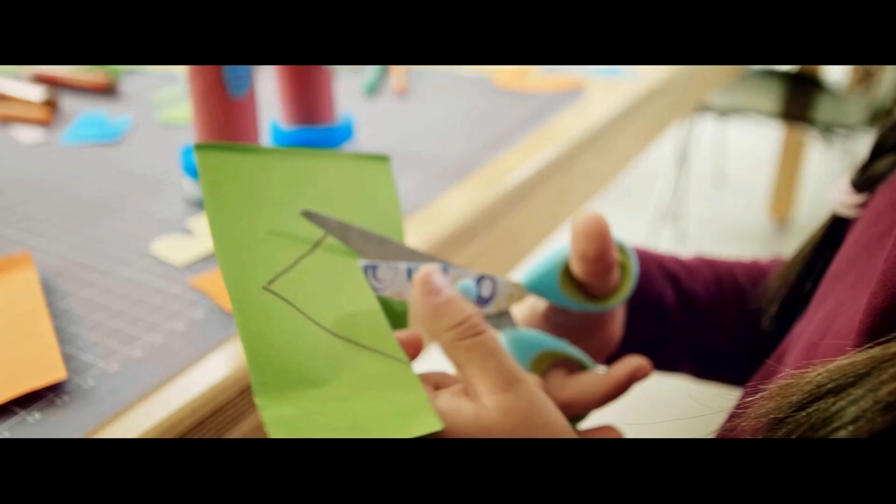This is Zoe, a little girl who builds a toy robot just based on her imagination. Wouldn't it be great if she could order this little toy robot as a really produced toy with just a fingertip?

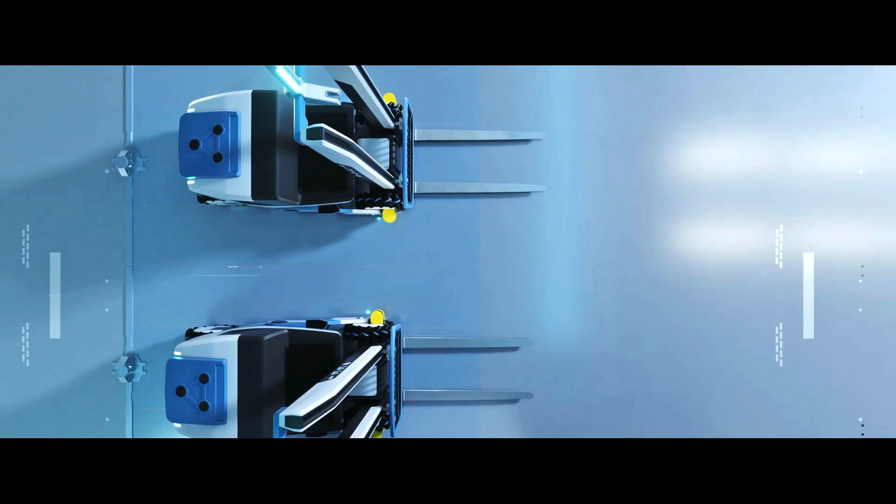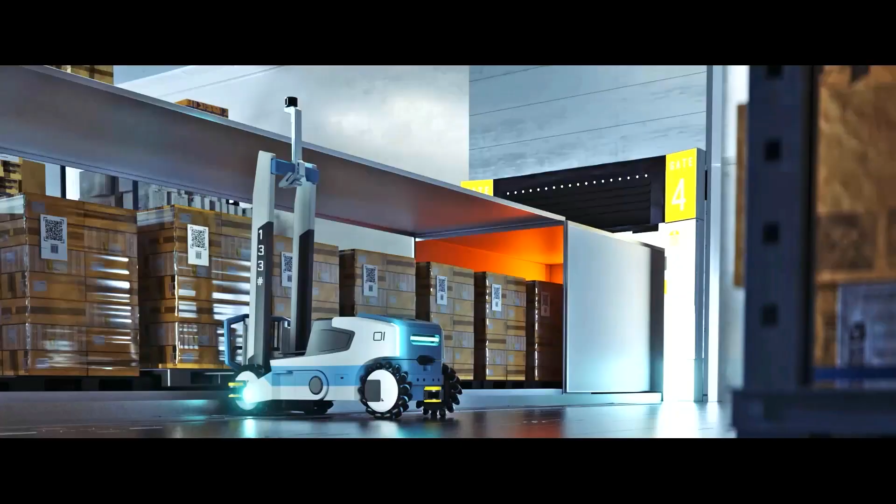Before production of this little toy robot can start, the whole supply chain must interact with the autonomous factory. The material must be delivered to produce the robot, and now we are in the material receiving area. There you can see how autonomous forklifts are able to unload load carriers and raw materials from a truck. For this, different AI technologies will be needed, like object detection, pose estimation, and the generation of the overall workflows of these forklifts. These autonomous systems will be equipped with advanced safety functionalities to allow for safe human-machine interaction.

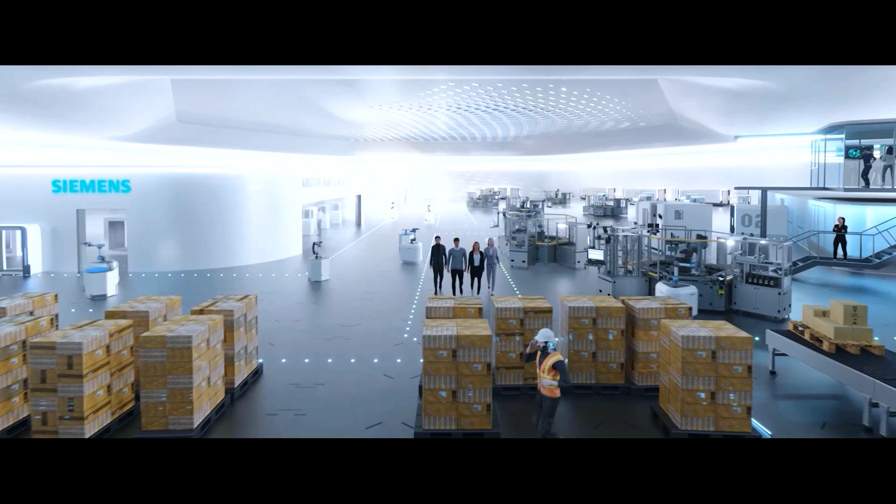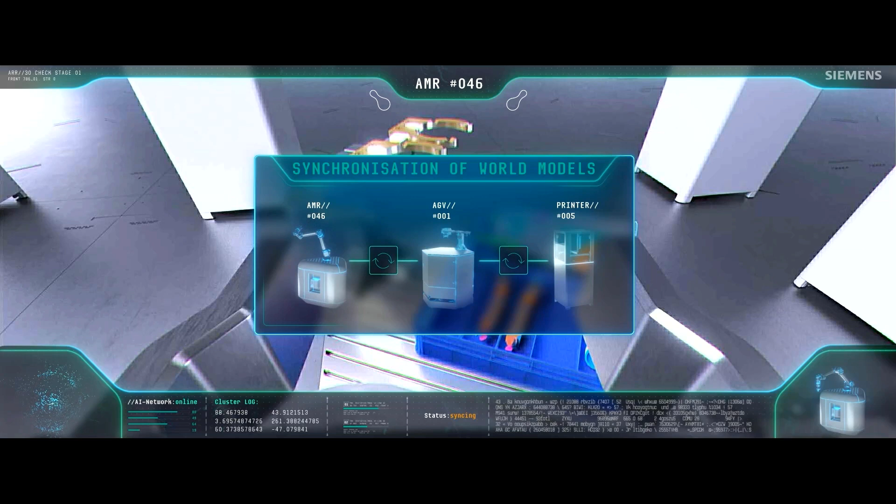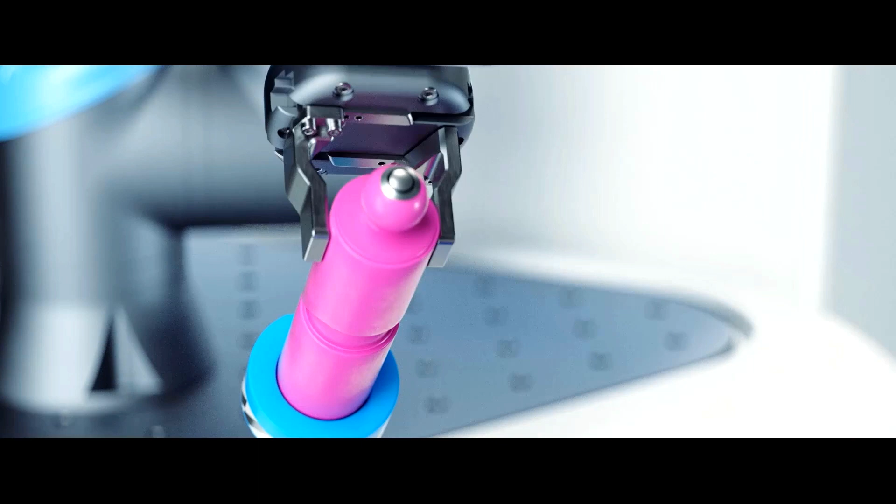And while our little girl Zoe is waiting for her robot to be produced, in the factory different intelligent systems group together to solve tasks collaboratively. To do so, they have to exchange information, for example perception of their environment, and synchronize their world models. But not every task can be handled with just a few machines; sometimes we have to break down very complex tasks into subtasks, like the assembly of the robot. To do so, we will need a central intelligence still, which is able to optimize the overall production process together with intra-plant logistics processes and assign machines with the adequate skills accordingly.

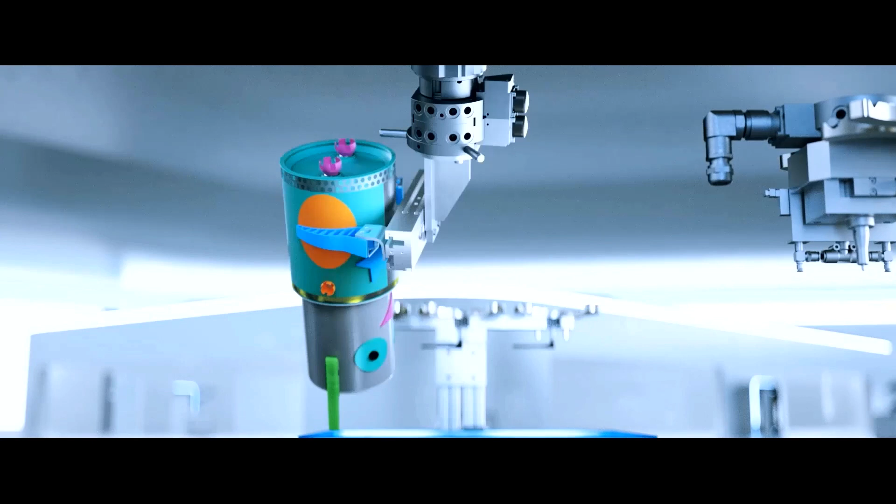But even the most intelligent systems using AI could reach certain limits. For example, if they are not confident about a certain prediction, they will ask for help. So this is a feedback loop between human and machine, to really give feedback to the system and let it learn continuously.

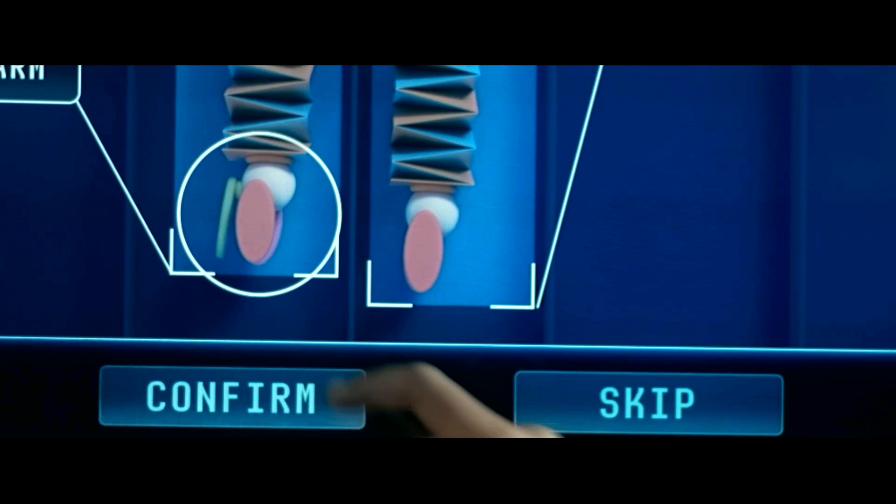So that's just a snippet of our vision of the autonomous factory of the future. But I think it gives you some idea how this could look like. Maybe it's 10 years, 15 years, 20 years away, nobody knows. But we really believe that this is key to hopefully make every wish come true, not only of this little girl, but also of every one of us.

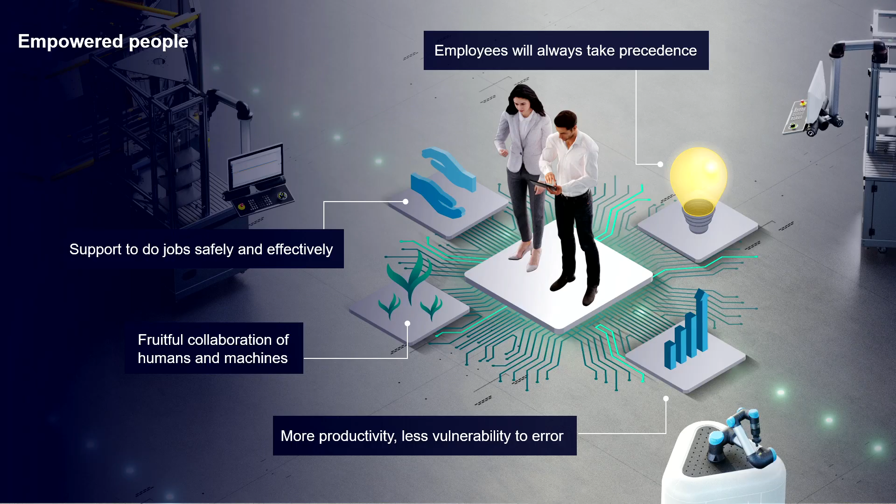What's really important for me, and I think you saw that in the video, the autonomous factory is designed by and for people. So this means we are not talking about lights-out factories or something like that. There is the human operator and supervisor in a central role.

This means there will be interaction between intelligent systems and the human being. There will be tasks that only can be taken over by humans, because the human is, in the end, unbeatable in terms of creativity, in terms of problem-solving skills, in particular in situations that you haven't experienced before.

So it's all about the interplay between artificial intelligence on the one hand side, where you have intelligent algorithmics, super fast processing power, can process huge amounts of data. On the other hand side, you have human intelligence, creativity, problem-solving skills. Bringing these things together, really getting the interplay done, this will be the next level of automation that we can achieve.

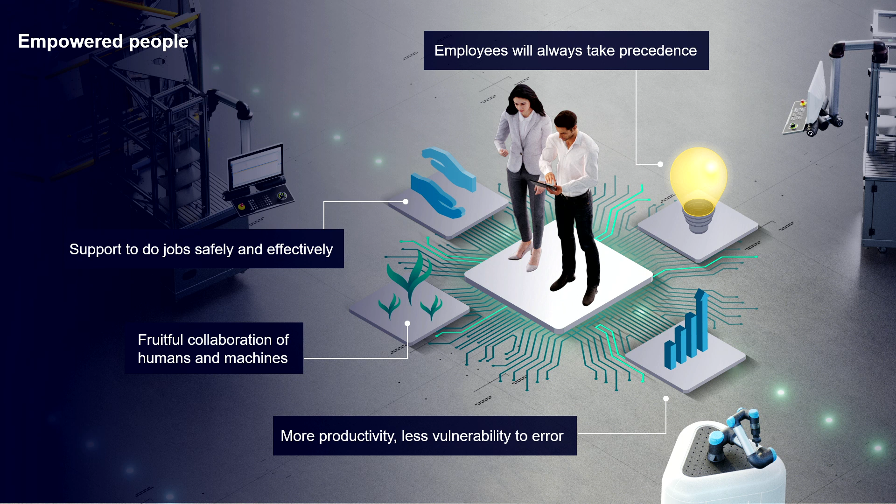Now I talked about the role of AI, and this is really one of the most crucial technologies in this game and in this vision of an autonomous factory. And in the meantime, you can see AI all around the place. It's extremely versatile. You can see it in different use cases in different industries.

For example, there are use cases that are a bit more simple, like anomaly detection, predictive maintenance. On the other hand side, you have even more complex use cases like process optimization, autonomous systems, as we saw it in a video, and you see it around here on the fair as well. More and more intelligent robots are coming up. And you can see that in every vertical, in every industrial branch, in automotive, electronics manufacturing, batteries, you can imagine.

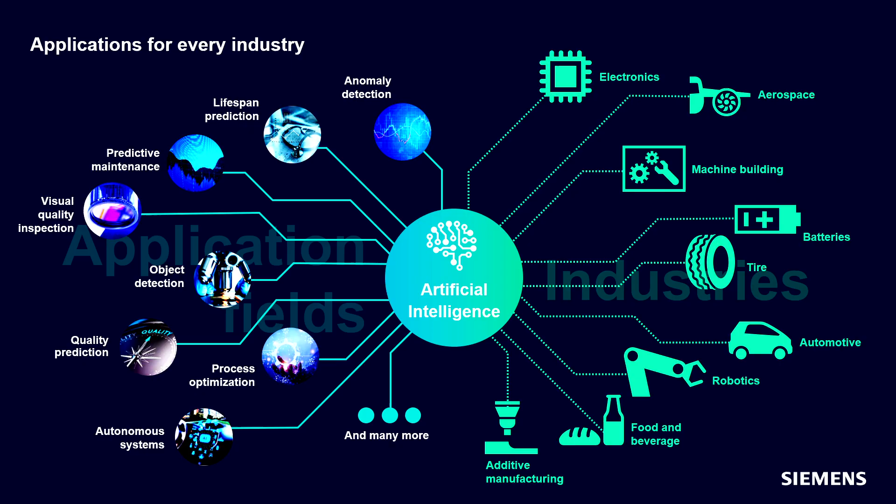And I brought 3 concrete examples. These are real customer cases that we've worked on at Siemens to make it a bit more concrete, a bit more explicit.

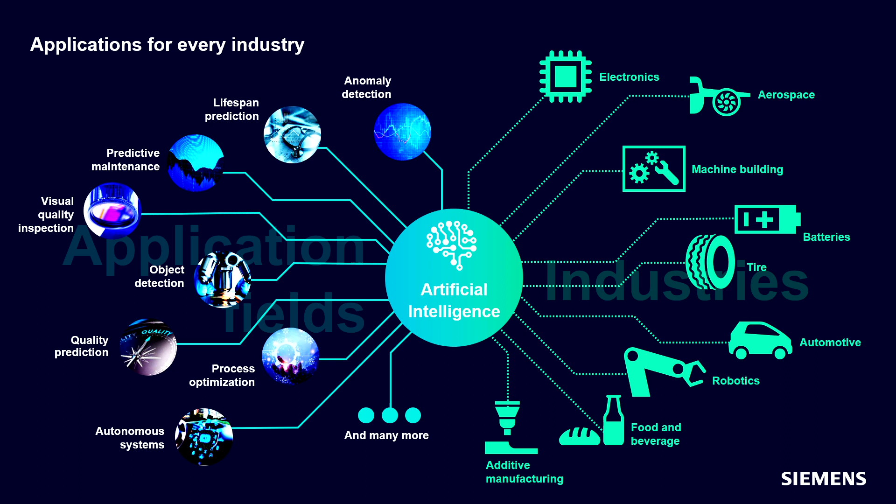The first use case is about handling of objects, grasping of objects. This is an important topic in material handling in production, manufacturing, of course, but even more complex it is in the e-commerce business, in distribution centers, for example.

So just think about your favorite online store, where you have a shopping basket with different items. They probably look completely different. But somehow, the distribution centers and logistics centers out there must pack these together into your postal package, so to say. So these bin picking and piece picking tasks are usually performed manually today in e-commerce.

Because you have so many different objects around that you cannot even program beforehand, obviously. So these are arbitrary, unknown objects, in particular in this area of application. And in distribution centers, for example, you have around 500 to 1,000 picking operations per hour, which are performed manually today in most of the cases.

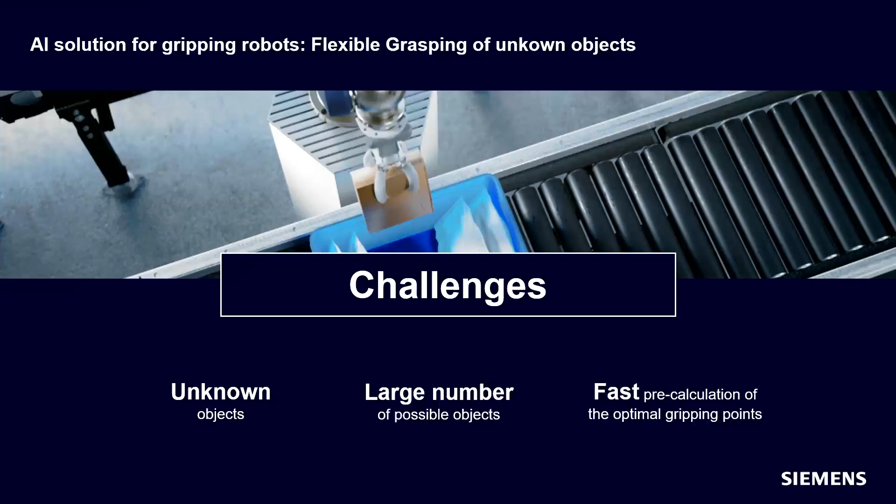So that's the use case, and there we worked with several customers already. And what did we do? We developed a neural network, so a deep learning model, that is able to calculate the optimal grasping point for every arbitrary object, even unseen objects at runtime.

So this means you can throw any object that you want, with a camera attached to the robot arm, with the AI model calculating behind. The robot will be able to grasp this object and handle it and put it into a box, for example. And this is something you can actually experience on our Siemens booth.

I will show you later on where you can find it. There is a demonstrator. There are colleagues around that can explain it to you. You can even bring your own object and own item. As long as it's not too big, you can just put it there, and the machine will be able to handle it and grasp it.

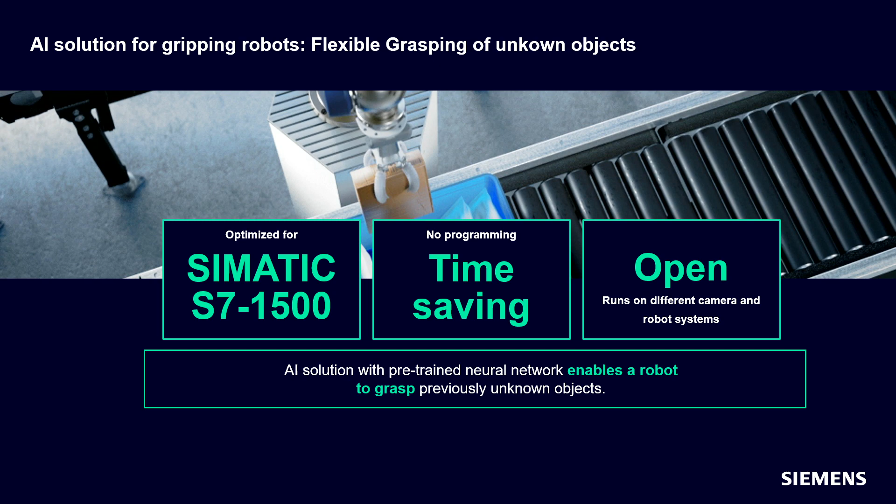AI also finds its way into the automotive industry. Did you know that in car body manufacturing, where different metal sheets must be joined, you need around 5,000 weld spots to join these metal sheets? 5,000? That's a big number, right?

So how could you ever inspect these weld spots if there are defects, if there are weld splashes that might be sharp, for example, that must be removed because they are safety critical? How is this done today?

Sample inspection. So you just have a tiny portion of these weld spots that are actually inspected. That's quite a big risk. It's high costs because you might have a lot of rework being done. So that's a challenge, and we tackled this challenge together with a big automotive customer in Germany.

And with the trained machine learning model that analyzes the overall process data of this welding process, we were able to increase the defect detection rate by 17%. So significant value already. And even more, we have 100% test coverage. This means no sample inspection anymore. For every single one of these 5,000 weld spots, we can calculate a quality score, and we exactly know if this is a good one or if there might be a problem.

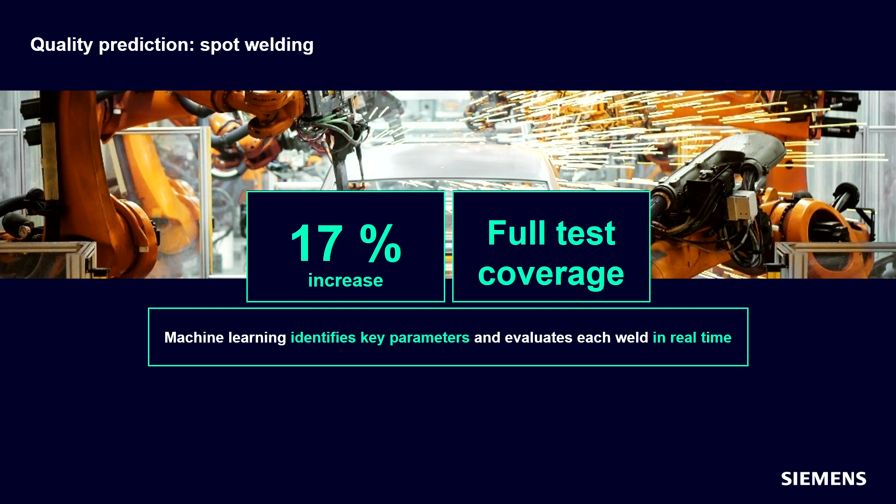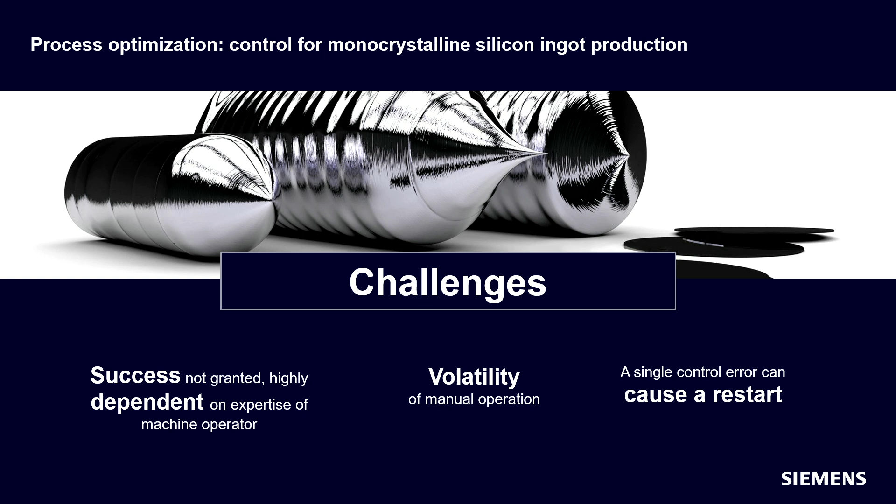So a customer in China who produces these silicon ingots reached out to us and said, I have some quality problems, I have some problems with my process, could you please have a look and help me improve that? And we tried it out in a lab environment of the customer first. The results were so convincing that we rolled it out to the factories in northern China. It's running at more than 30 machines already now. And I will tell you why this is so important.

This is a super complex process. Today, everything is programmed manually, and you have people running around having a look at the process, how the chemical behaves, so to say, if you need to adapt some parameters. So it's a mixture between different programming, late feedback on whether your parameter changes really have an effect, and a lot of human effort still. So we trained an AI model based on historic data to improve this production process.

And what did we achieve? I said we rolled it out because it was so significant, and you can see the numbers here. We were able to improve the production speed by 8%. This is already a significant improvement because throughput means you can produce faster, you can produce more, obviously. But even more significant and more outstanding are the quality KPIs and the numbers that we achieved there. We achieved a quality improvement of 65% or even 78%, depending on which quality KPI you take into account.

When we talk about quality, it's all about a flat surface. You don't want to have structure losses, for example, because in the end you want to have high quality wafers that you use for solar panel production. So really outstanding achievement using AI, and this is a really complex use case.

We are not talking about anomaly detection or predictive maintenance. These use cases are also relevant, and we have to tackle those. But we are talking about a much more complex use case where we really go into the control of a process, where we really optimize the overall system. And in my opinion, there is so much potential still out there. If we are going to tackle these use cases, we can really, really significantly improve production processes even more.

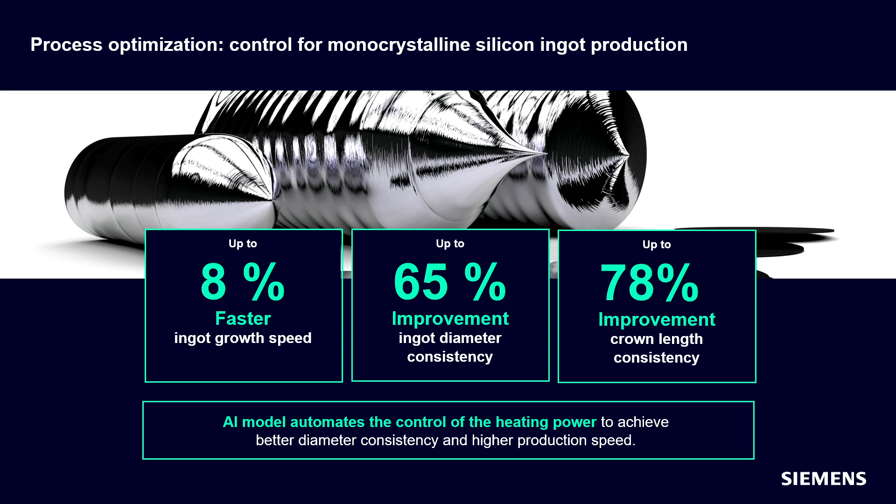So you have this one loop where you build your AI model, and you have this other loop where you run, where you operate your AI model really in production. If we have a look at the different phases of how AI models are built and then run, in every phase you will find challenges still today in industrial production. Because AI in industry is so much different from AI in the consumer world. For example, starting in the beginning, when you want to plan and specify your requirements, it's really important to have such KPIs defined.

How are you going to measure success of your AI model? What's actually the benchmark? So maybe there is a running system today. How do you really make it measurable that your AI really works?

Really important point. Then it's, of course, about data quality. We often face imbalanced data in production, and this will lead probably to low-quality AI models. If you have low-quality data, probably your AI model will be low quality.

So it's all about data connectivity. It's about using synthetic data generation, so using data from simulation, for example, from the virtual world, to augment your real-world data and improve the training of your AI models.

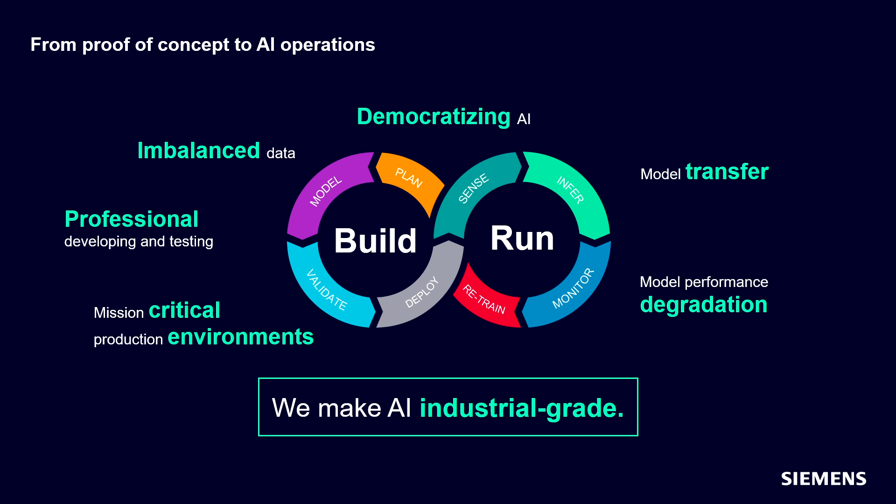Then it's about validation of your AI model, even certification in the future. There are authorities discussing about that. Maybe you heard about the EU AI Act, which is currently under discussion. So for safety-critical applications, for example, or whenever data about us as humans is involved in the training processes of AI models, there will be certifications needed and auditing needed of AI models. This is also something we will have to take care of in the future.

And then you're going to deploy your AI model into the real world. It's running, and most projects actually stop here. So you think, okay, now the POC is running, now let's go. But it's not like that. AI will not run forever and just work, but usually performance of AI models goes down over time.

Why is that? Because the data changes. Some sensor values might change, maybe some people in production change something and tune around on the hardware. This might have effects on your data, and this might mean that your model never saw this data before. You could call this data shift or concept shift, for example. This means the AI model will not be able to deal with that data. It will not be really accurate anymore, or not confident enough anymore to really make a decision.

And then you have to take care of that, and you better want to know that this is happening. This is what we call AI monitoring. So you have something like a watchdog over your AI model. It controls your model and then understands if something is going wrong. And then you can retrain and improve your AI model.

So you see a lot of challenges still going on. Good news is, we are working on that. We're working on all these challenges and all these phases. We will make AI industrial grade, robust, reliable, and trustworthy. That's the goal.